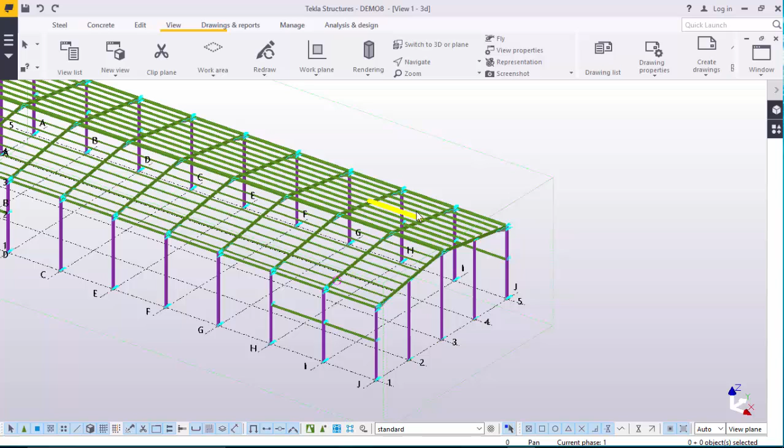We are going to continue from where we left by starting right away with purlin reinforcement. By that I mean we are going to use cleats, stays, tie rods to stiffen up our purlins. Let's get started by going straight away to cleats. We'll type 1.

Once you've typed 1, we are going to use cold rolled. We will be able to get stays and cleats. Click on that thumbnail, zoom closer to a point where you want to locate your cleat and stays. Click on the beam, click on this member and this member. Click your middle button on the mouse. Like that. Right click to disable that command.

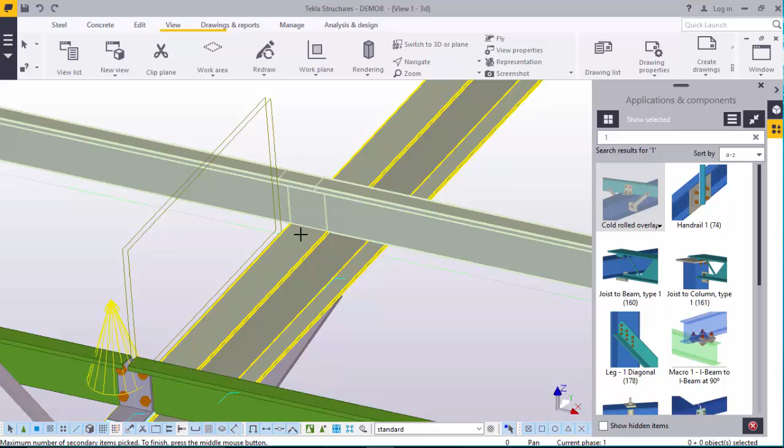Go to navigate, rotate. That's exactly what we wanted. Now you'll proceed with the same process. Go back, click on the beam, on that member and this member. Press the middle button of your mouse like that. Right click and disable that command.

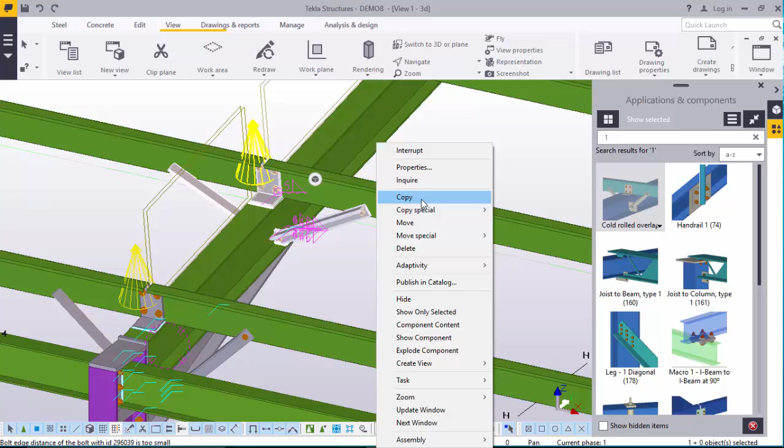Now all these, instead of going all that round and clicking that thumbnail for cleats and stays, we will copy these reinforcement for purlins. Click on that, right click, go to copy, select a point that is convenient to you to pick the joint. Click that.

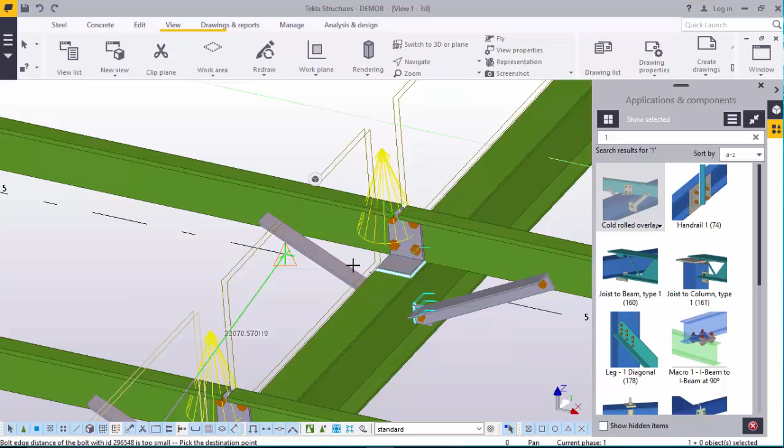Click that. Click that point. Make sure you zoom very close. Click that point. Click that point. Until you'll be able to reach the very end of your rafter.

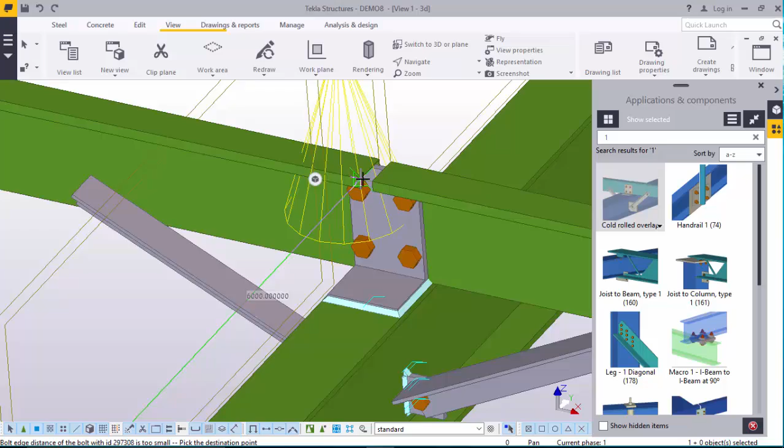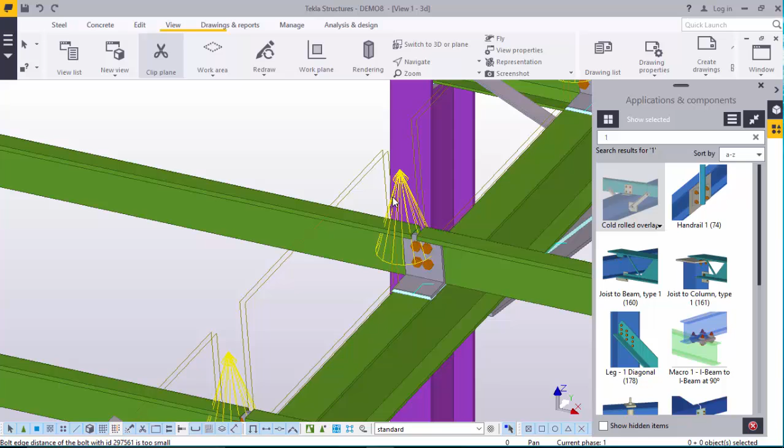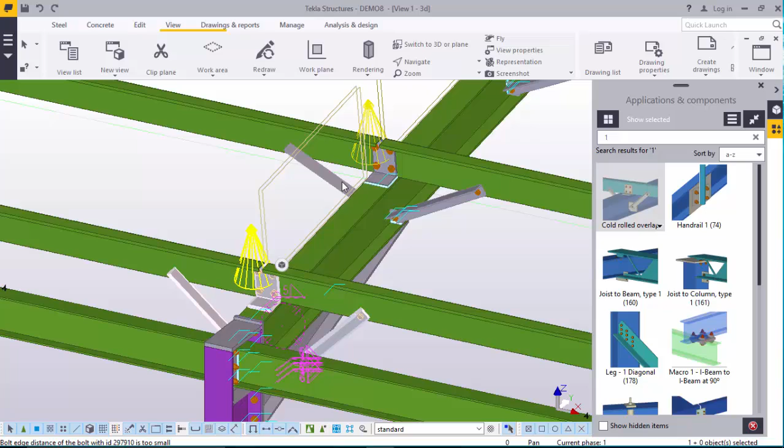We'll do away with this by clicking on it, right click and delete to activate the cleat. To enable you delete it, come back here, click this member and this and press the middle button of your mouse. Once that has been done, come and select all these by pressing the control button on your keyboard. Select all these. Make sure every member is picked.

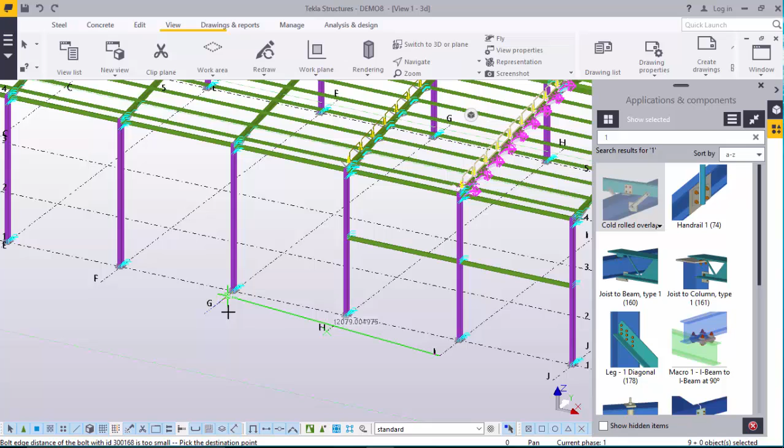Now come down here, right click, copy. You can pick from that end, this end, that end. Zoom closer, make sure your cursor snaps at the right point. Zoom closer, click that. Click that, click that.

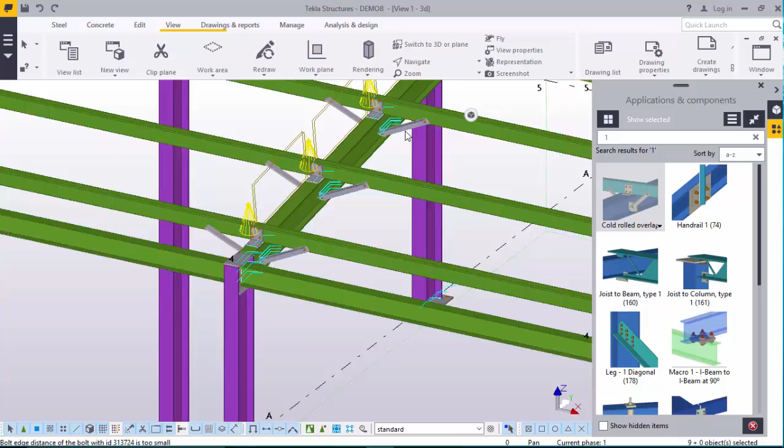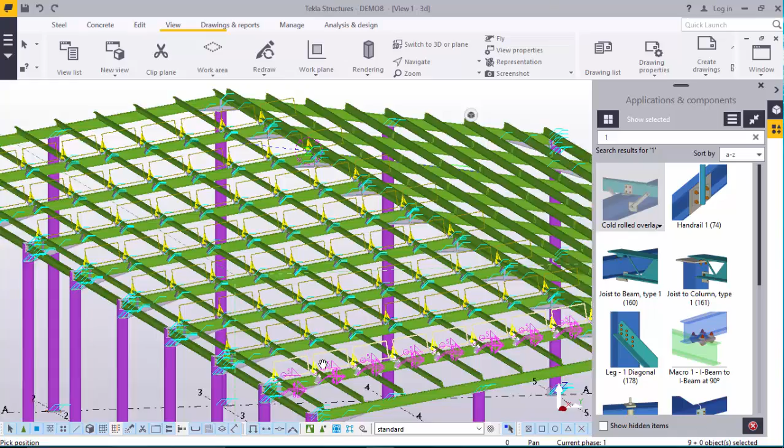Not necessary at that end. Zoom closer and check whatever you've actually done. I mean, this is right for what we intend to do. Rotate your model, go to navigate, pick rotate by mouse, and rotate and check what you've actually done. It's okay. Right click, interrupt, and redraw. That's great. Rotate your model properly.

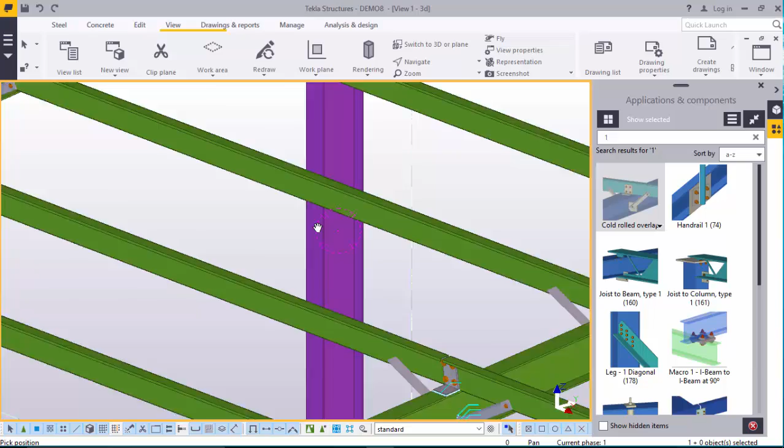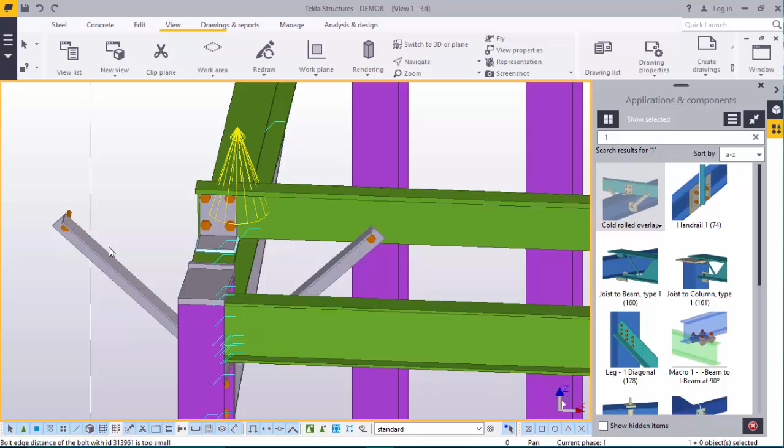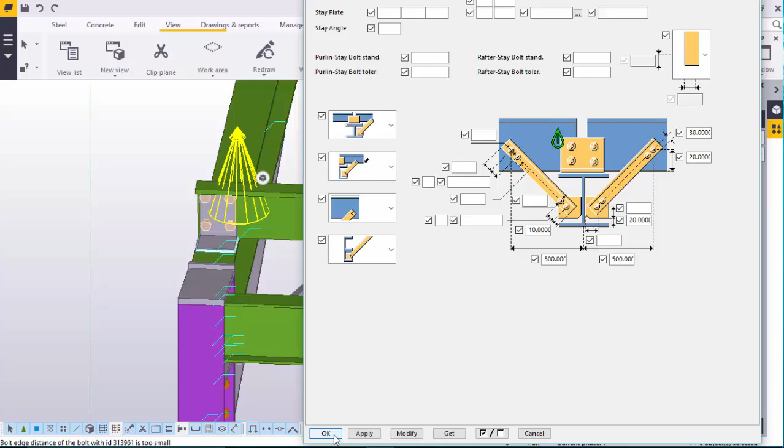Now we'll come to the end of these purlins. Come to cold rolled overlap. Click this member, that member, right click. But you'll see you have two stays, 1 and 2, but we don't need the left one. Double click on this joint. Control Tab to enable you navigate to a point that you'll be able to pick the right stay. That's done. Apply. Okay. Now you will copy this again by clicking on it, right click, copy.

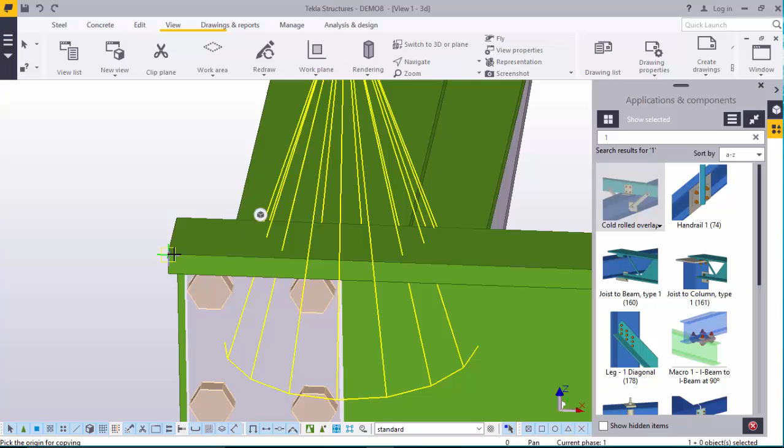Now we'll zoom closer and pick a point where you will be able to move this cleat to another purlin. I'll pick this end, come over here and pick this end, come over here again and pick this end. We'll move on like this until we reach the end of our rafter. Click that. It's actually coming up. Just zoom closer to ensure your accuracy. Make sure you are very accurate. Zoom closer. Click that.

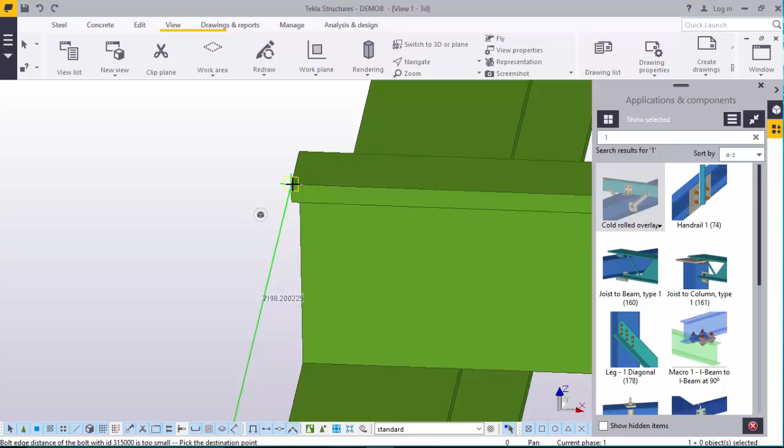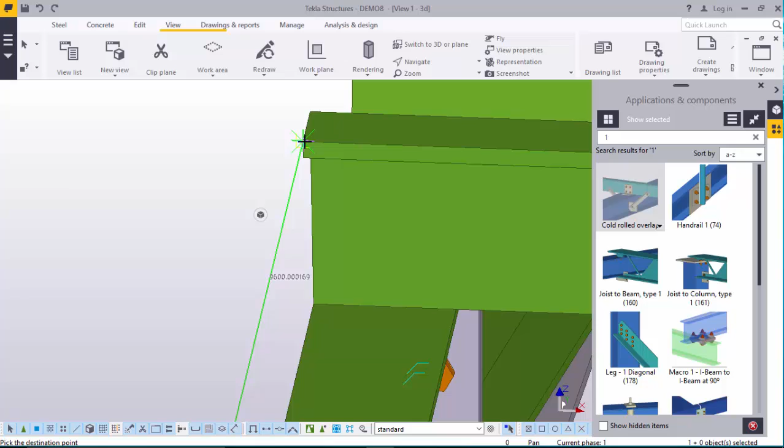Click. We are close to the end, not to the end of the presentation. Zoom close. Right click to disable the command. Go to navigate, rotate by mouse.

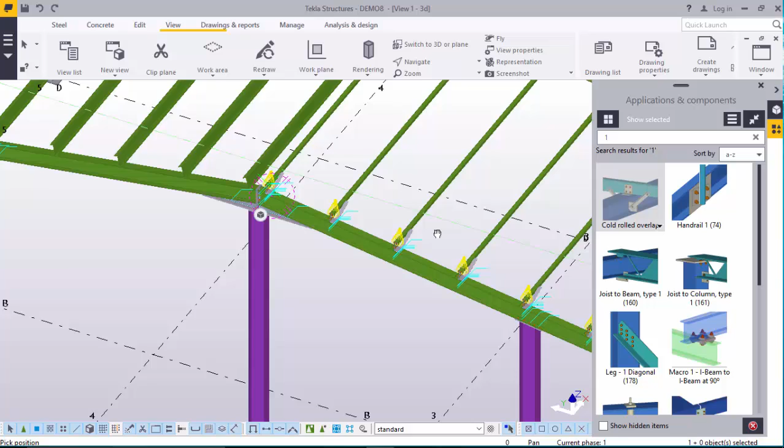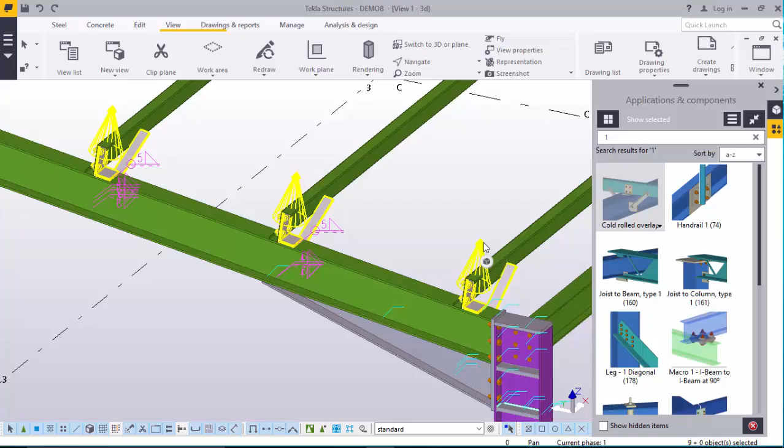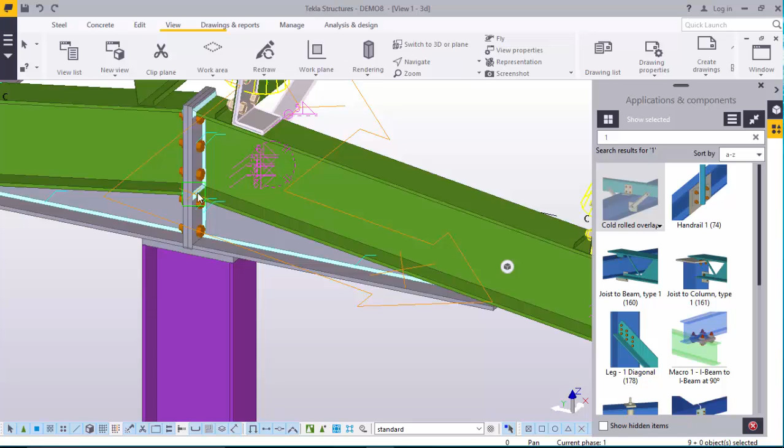Two options here available. We can mirror all these by selecting all these joints. Just select everything. Select that. We want to mirror this using our XY axis. Now to go to our XY axis, we'll go to work plane tool. Hover your cursor, mirror line. Need the XY axis. Make sure you're very accurate. Right there. Right click, interrupt to disable the command.

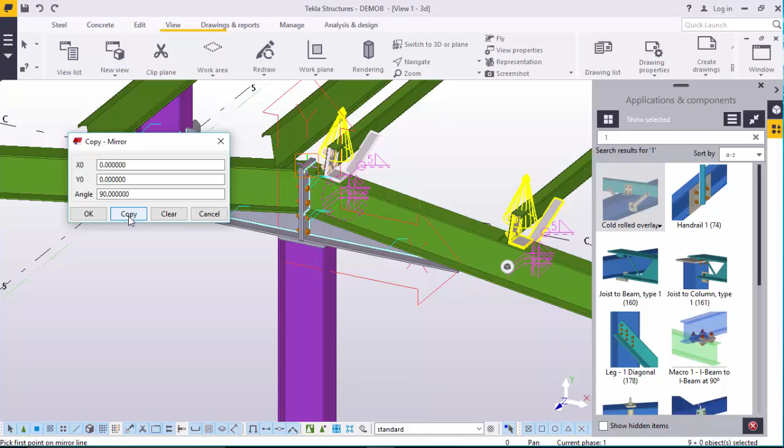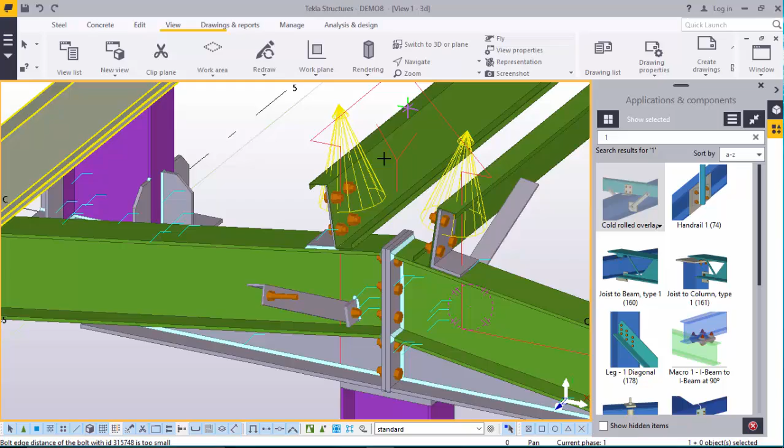Now, having done this, right click, go to special copy, go to mirror, feed your angle of rotation. We need 90 degrees rotation. Click copy. Copy. Okay. Not actually working. We'll go the manual way. Click this and press that. Rotate that. Double click on this.

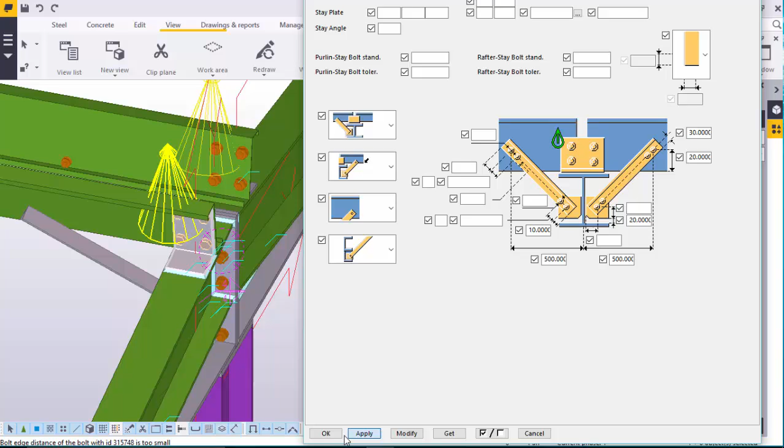On your keyboard, press Ctrl Tab button again until you reach your stays. Change this to a single left stay. Apply that. Make sure you're able to navigate through and rotate and see what you've actually done.

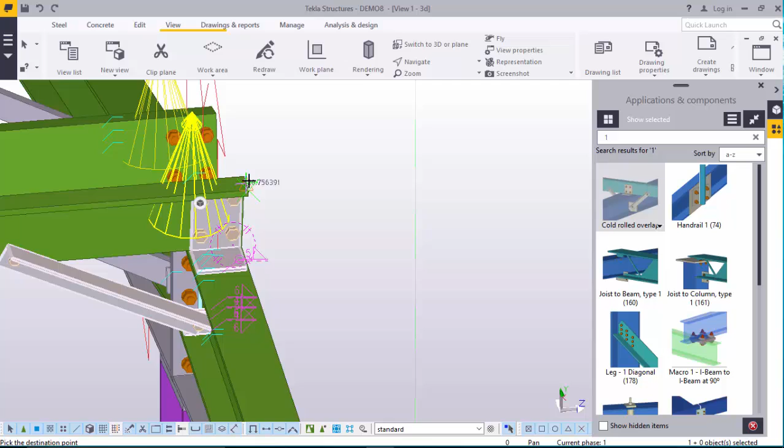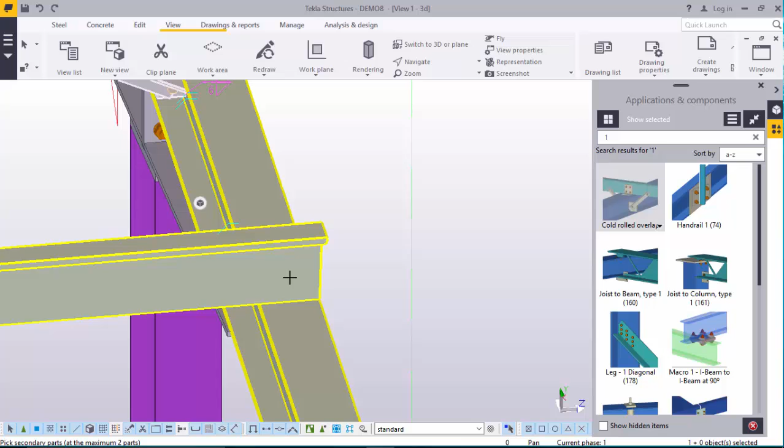Having done that, we want to copy all this to the rest. Pick that. I'll pick it from this point. I'll bring it to this end. Not working, just go manually. Click this, that, this, that.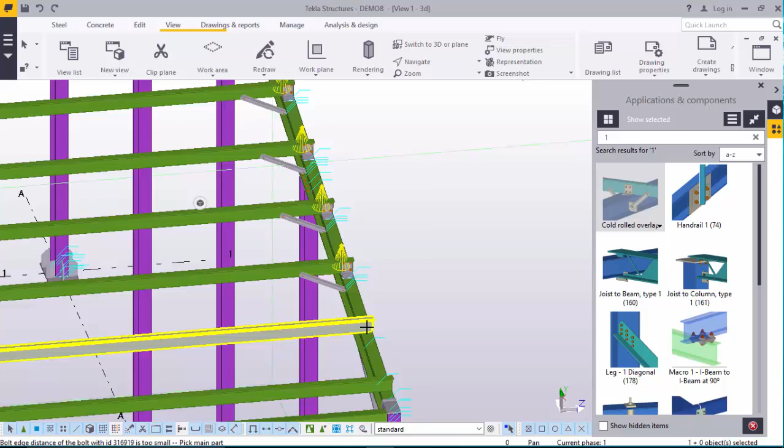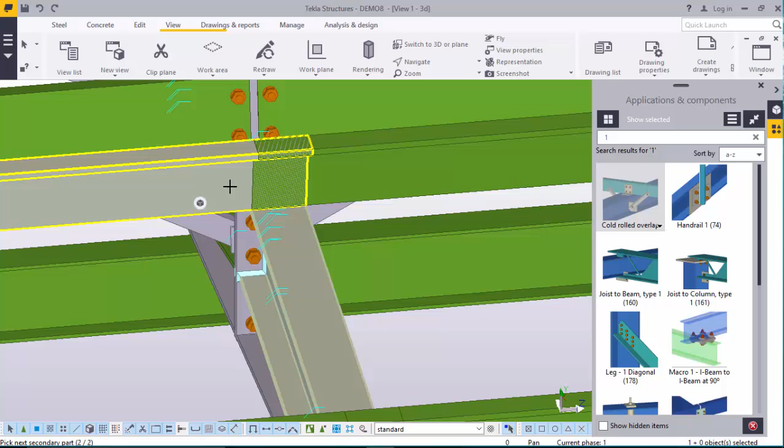Just move on. Actually, TEKLA is very fast compared to other softwares, and very, very interesting to use. Click this and this. Now here we will go back and ensure that we select double stays. Click that, modify, apply.

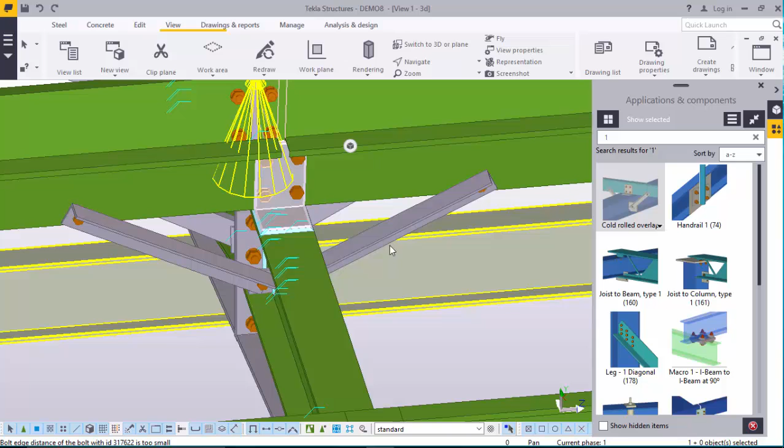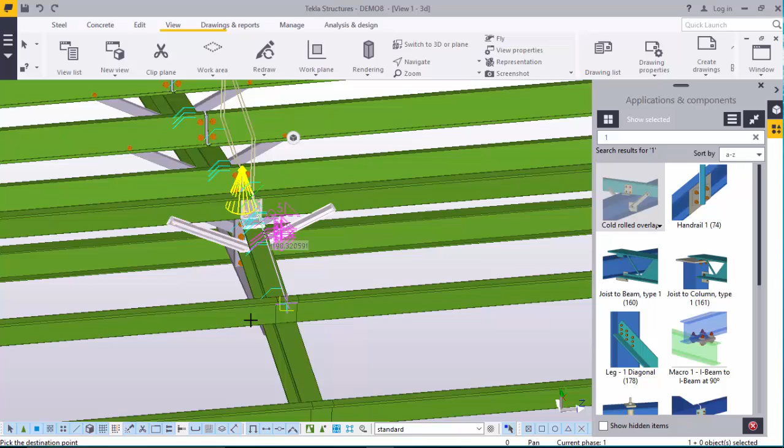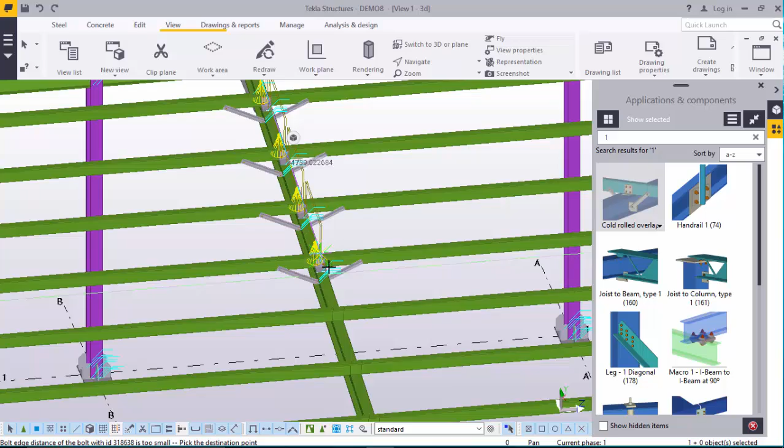We'll copy all this by right clicking, copy, pick it from that end, bring it there, bring it there. Here we are. We are trying to be a bit faster so that we don't take a lot of time doing this. We are done with that.

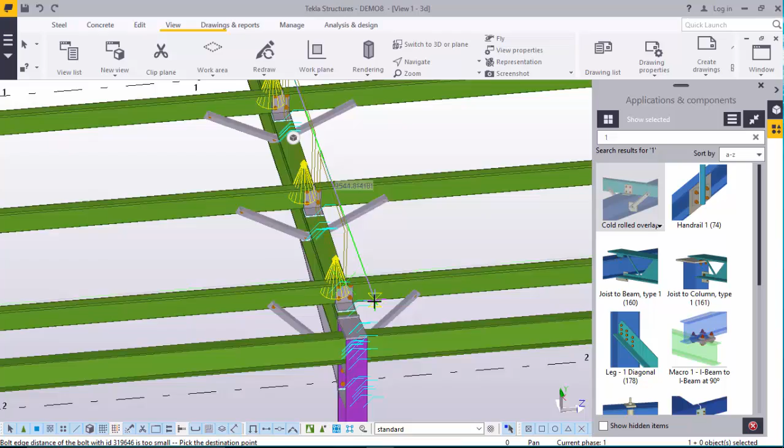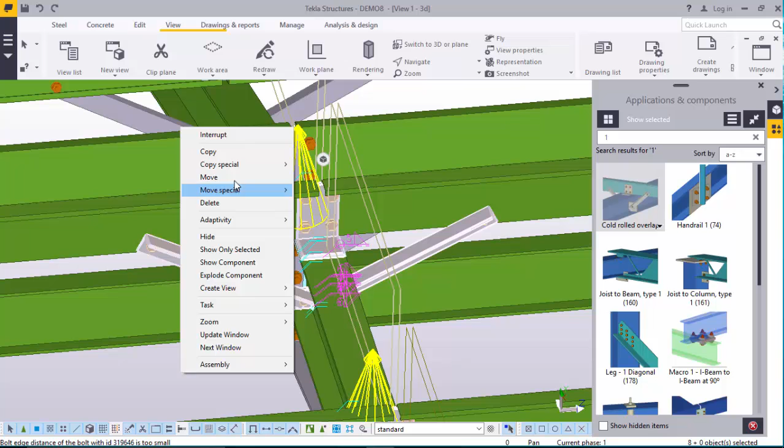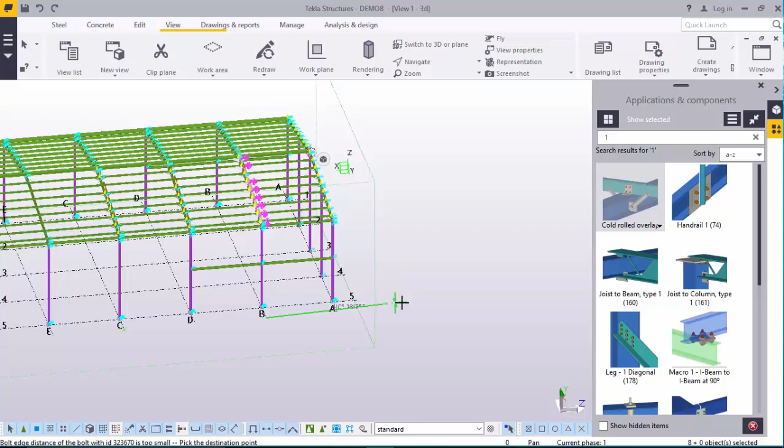Now to move faster, we'll select all these. Select that, select that, select that, that and that. Right click, click copy. I'll copy it from this point. Bring it there, bring it there. Move on like this. Make sure you zoom very close so that you will be able to see every point you're placing your cursor on.

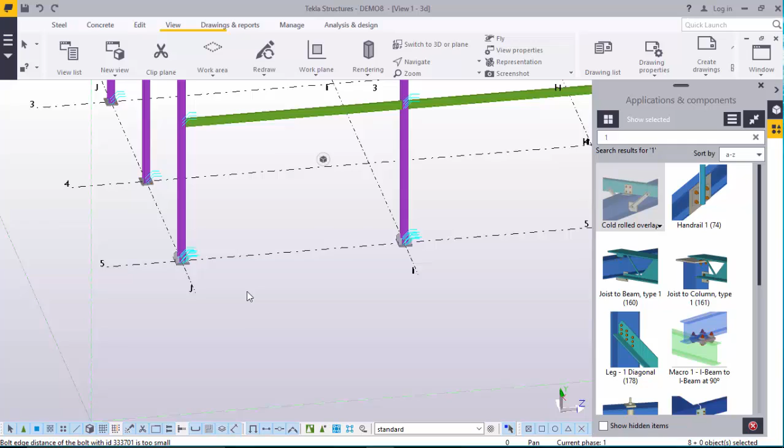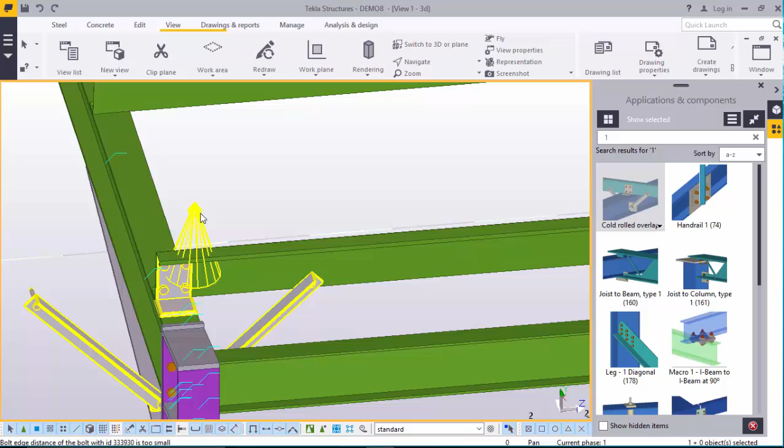Just copy, copy that, paste. At this point it is not really necessary because we have single stays. Interrupt, redraw to refresh. Now we'll go back to cold rolled overlap. Click on that thumbnail, click on the main member, that, and press your middle button. Double click on this joint, Control Tab key.

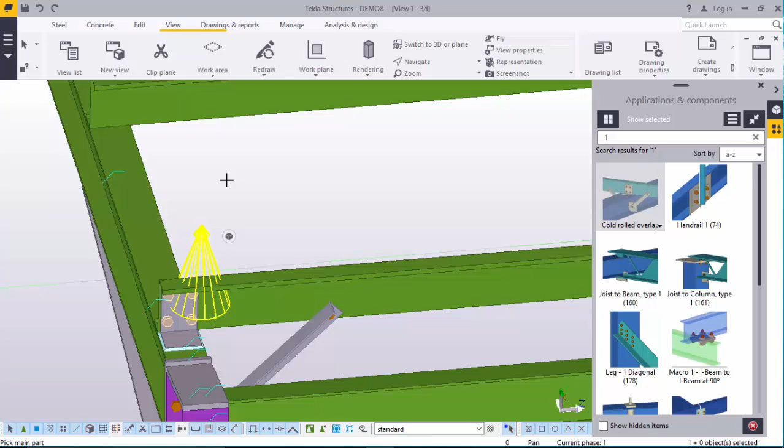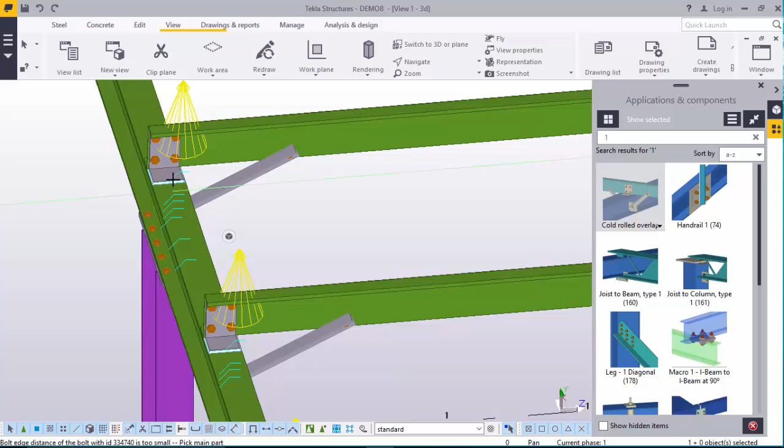We need a right stay. We'll pick that, modify, accept. We'll move the same way. That main member, this, press your middle button on the mouse, main member, second member, and press your middle button on the mouse like that, and you move on. Let's try to be a bit quick. That and that, this and this. Yes,

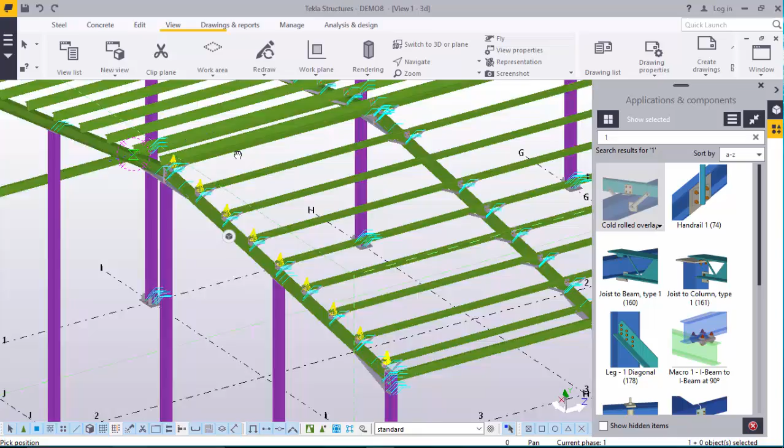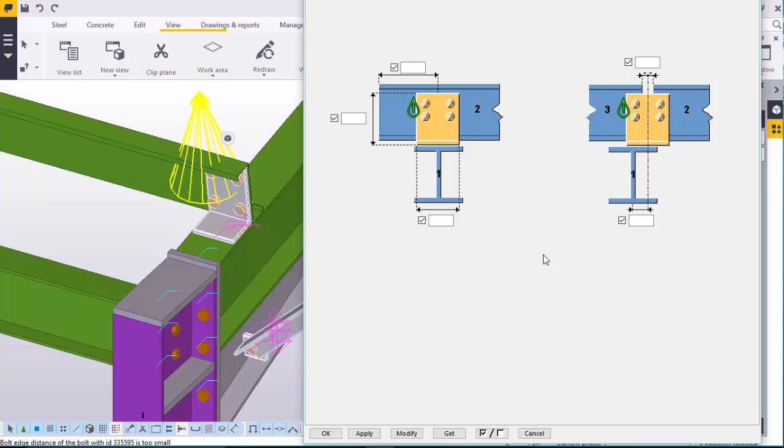you're almost done. Go to navigate, rotate your model, come to cold rolled overlap, click that and that. We need this on the left. Double click on this. On this dialog box, press Control Tab, press again, right there, click left stay, modify, accept, click on the main member, second member, press your middle button on the mouse, like that.

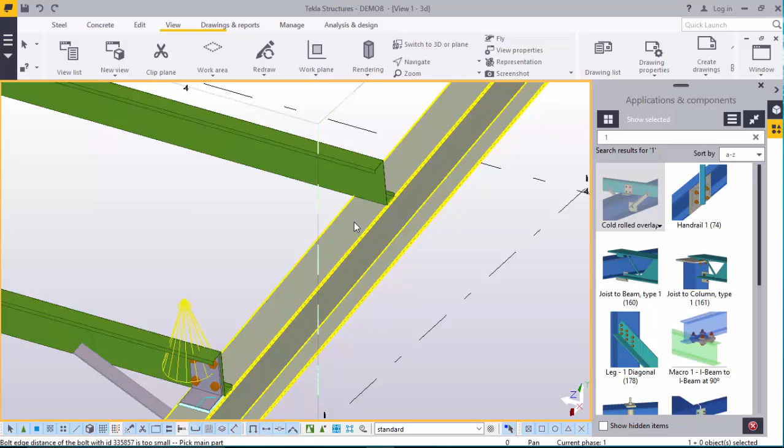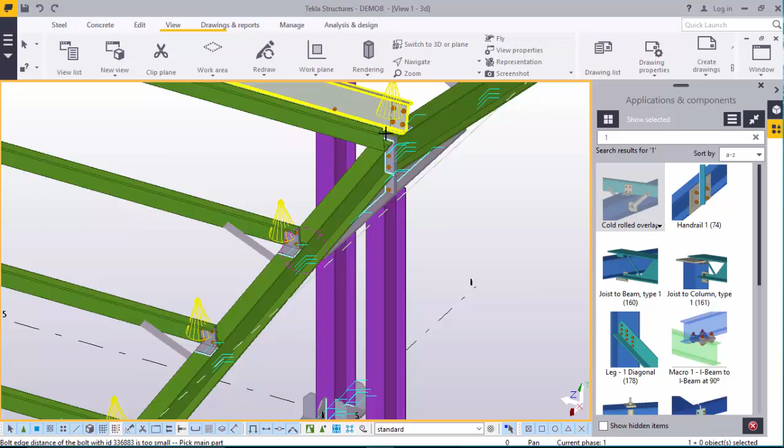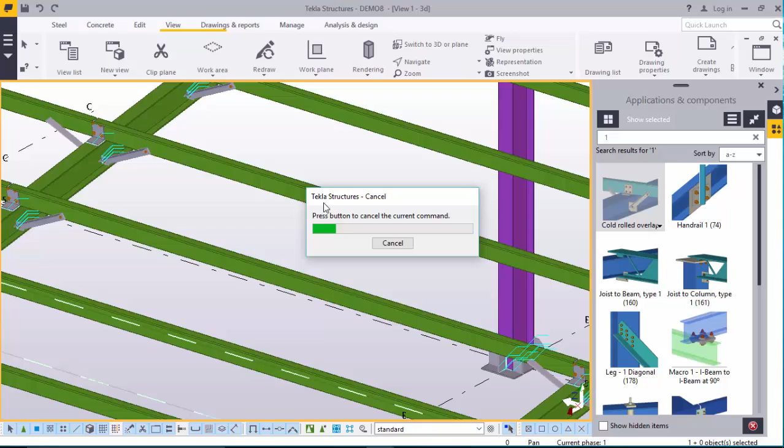Let's move very fast. You're done. Right click, disable the command, navigate to check on your joints and everything you've done. Click again, redraw. Redraw here means to refresh in Tekla command.

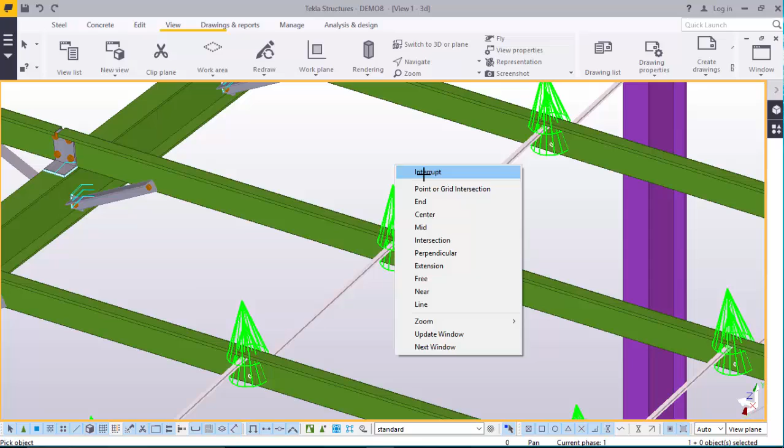Now we go straight to tie rods. Tie rods will use 23. Try to be a bit faster here. You want to reinforce these purlins. First of all, click on this member and that member and select all the purlins. Make sure you select all the purlins on this side. Press your middle button on the mouse. There you are. Right click, interrupt. Click on the screen. Come back again. Click on that.

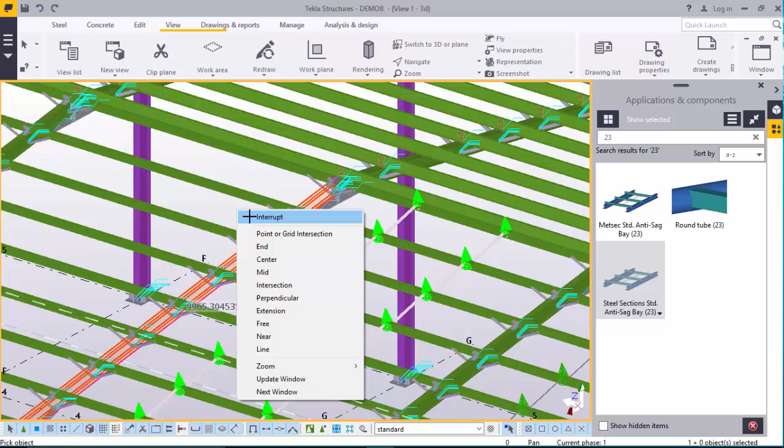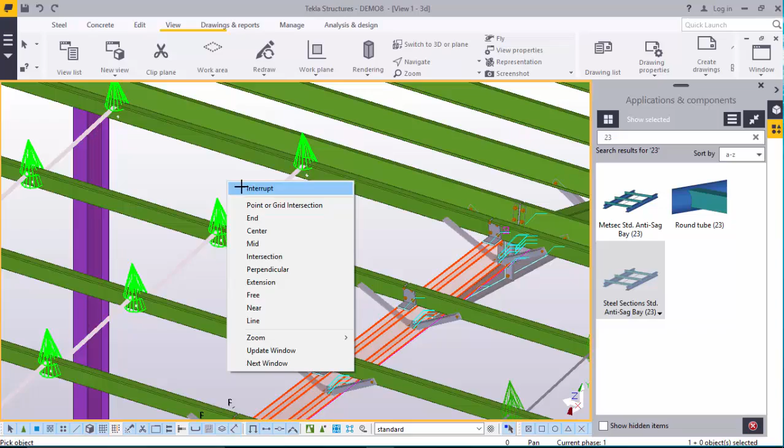We need tie rod between that beam and this beam. Go ahead and select all the purlins like that. Press your middle button on the mouse. Right click, interrupt, click on the screen. Need this. Your middle button, click on the screen, go back. We need tie rods in between this beam and this beam. We'll pick that beam, pick this beam, then select every purlin. Make sure all the purlins are selected in between the two beams. Press your middle button, right click, click on the screen again. Just repeat the whole process.

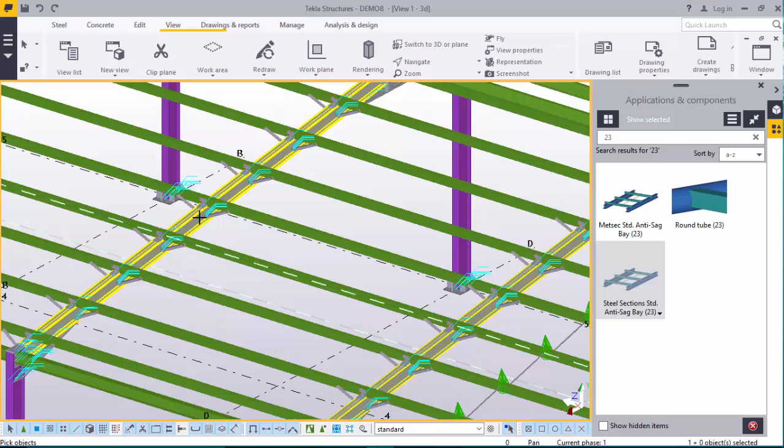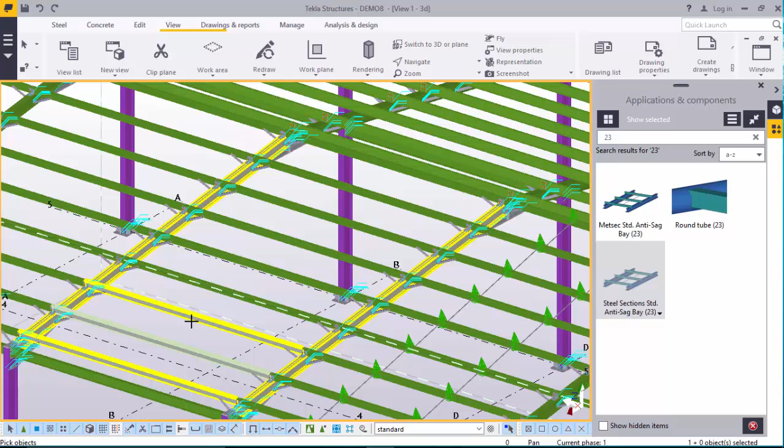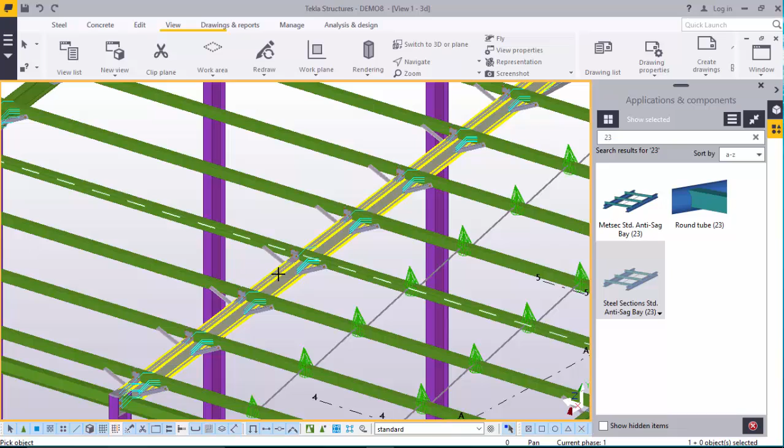Click on the screen, click that, and reinforce all these. Right click, click on the screen, between this and this. Make sure you select all your purlins. Go back. Want to select all these. The middle button. That and this. Middle button. Go to navigate, rotate with the mouse, pick a point where you want to rotate your model about.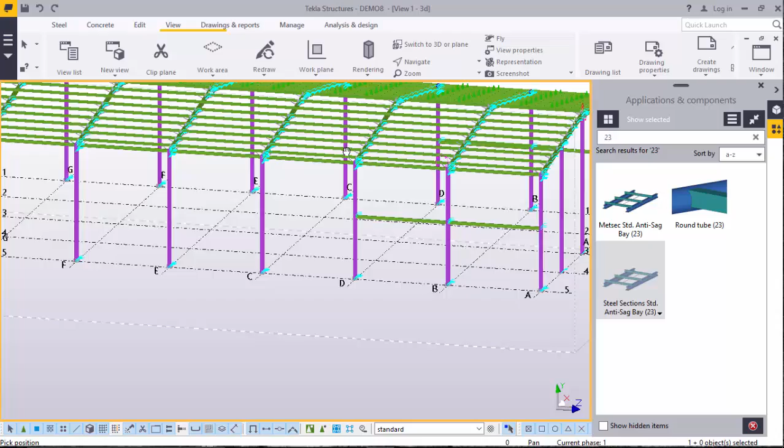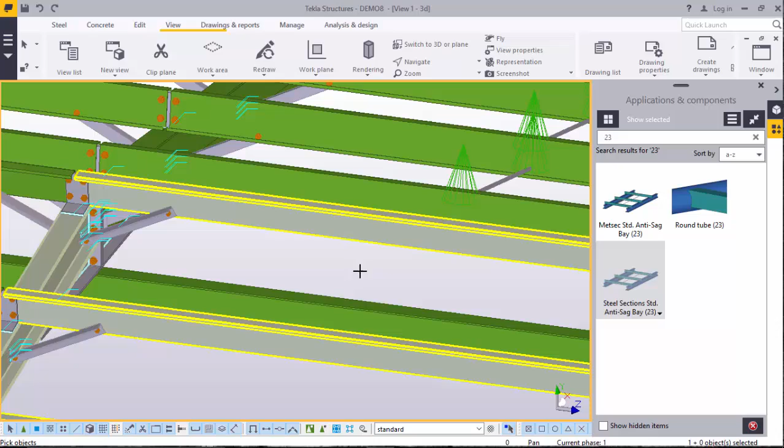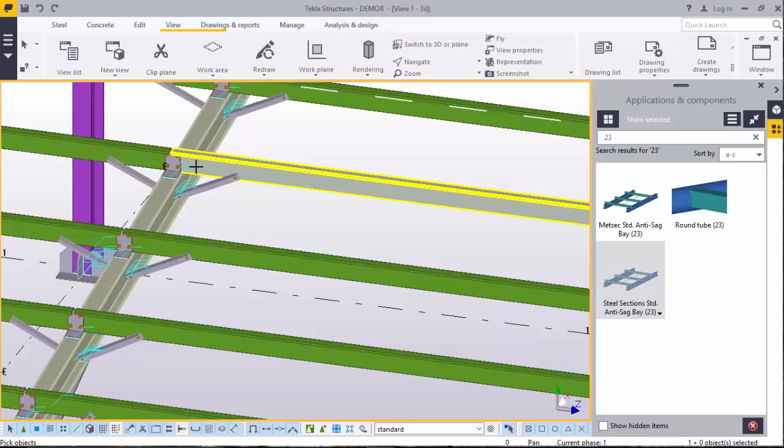Come here, pick, select that and this, make sure you select all the purlins before you apply the tie rods. Click on the screen, just move like that, and this. Click all these purlins. Right click, disable the command, click on the screen, select that and this. This and that. The middle button, disable the command, click on the screen. Pick this and this.

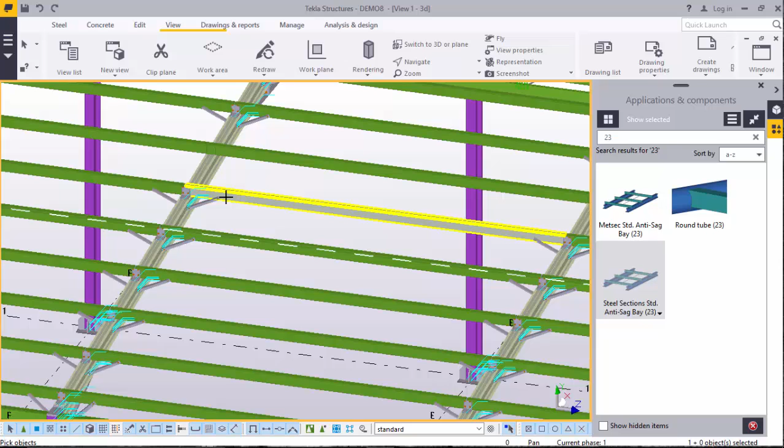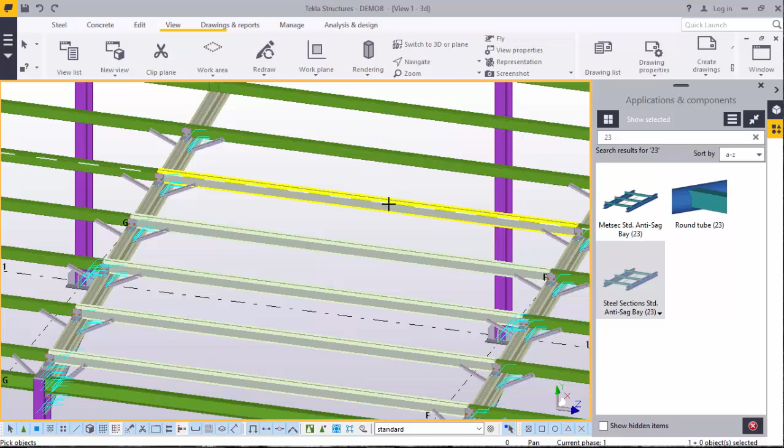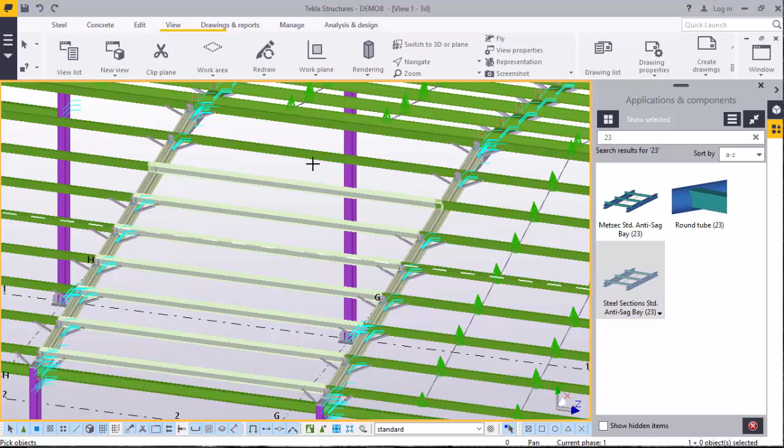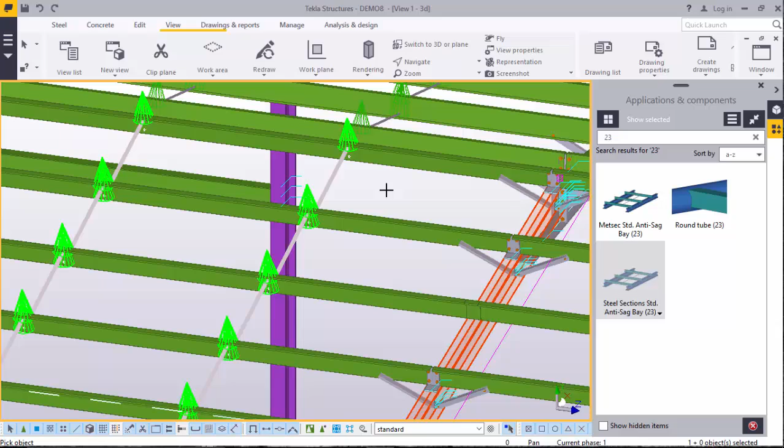You're closer. Just be patient. That and this. This makes our purlins very strong. Failing to do this, you might end up with a very funny sagging roof, which is not right. Click on the screen. You need tie rods between these two. Select all the purlins. Right there. Pick that and pick this. Select all that. Middle button.

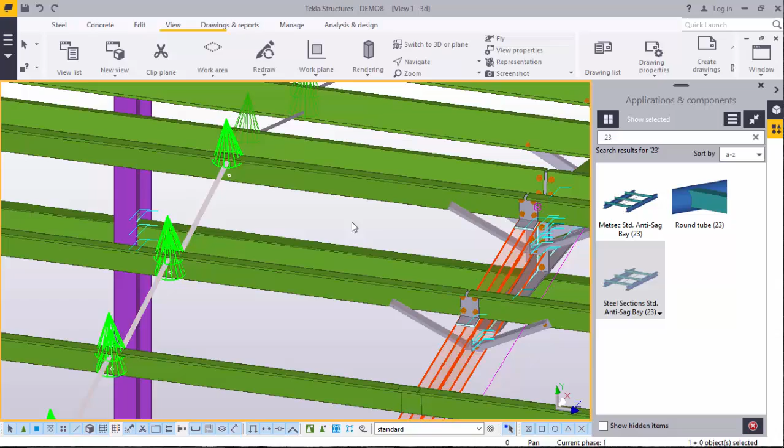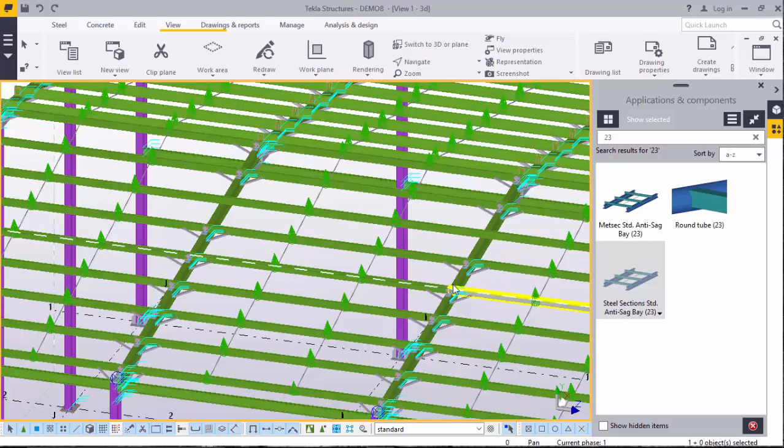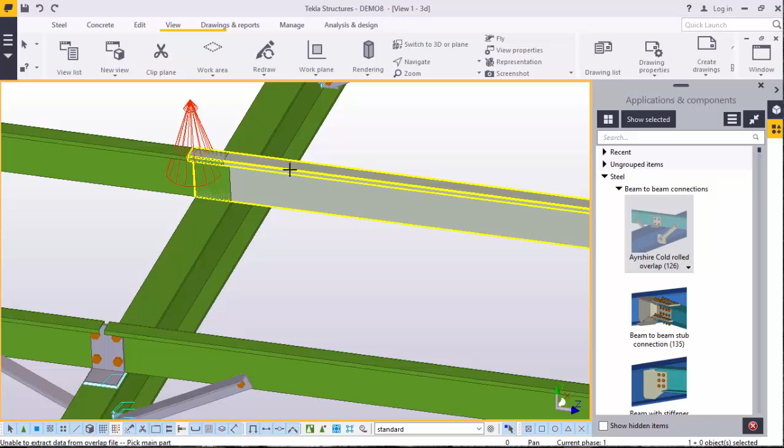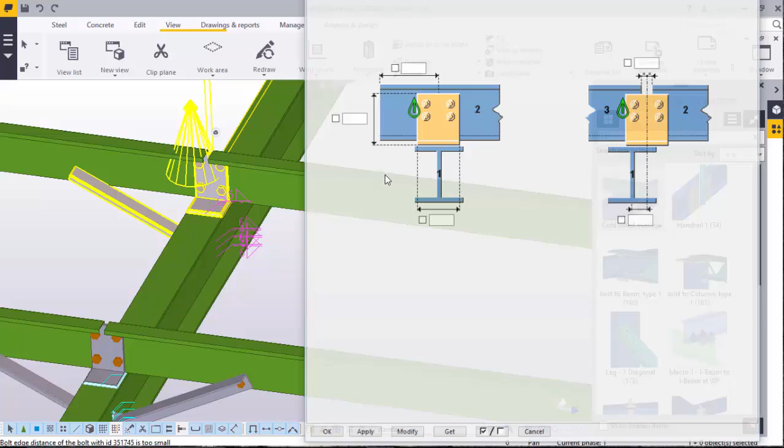And that could be the final. Now if you are keen enough, you could point at this that we left. Now we'll go back to cold rolled overlap. Click that and this. Not responding. That and this. Delete that. Double click on that. Click on this dialog box, press Ctrl and Tab on your keyboard. You need two stays. Press modify, apply, and accept.

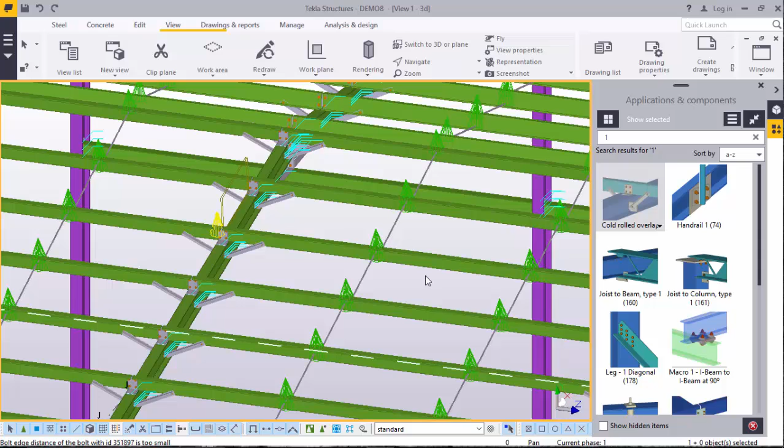Right click, redraw. Redraw here is refreshing in TEKLA command. Go to navigate, click rotate with mouse, rotate your model. Here we are with our stays on, our tie rods are here.

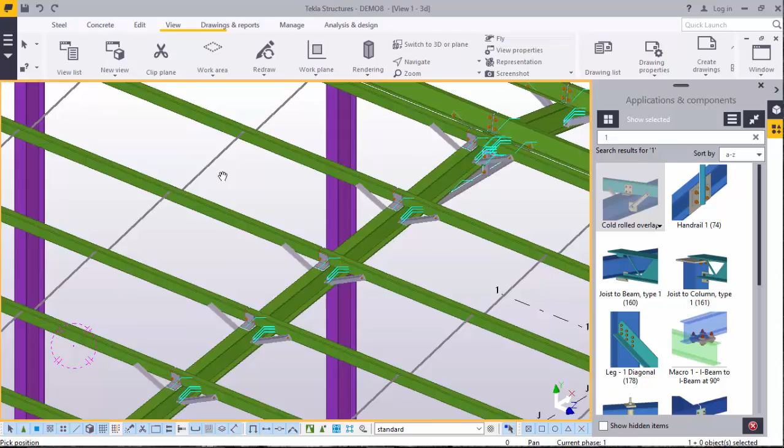Thanks a lot for watching once again. Next presentation we'll be working on the column bracings and on purlin and rafter bracings.